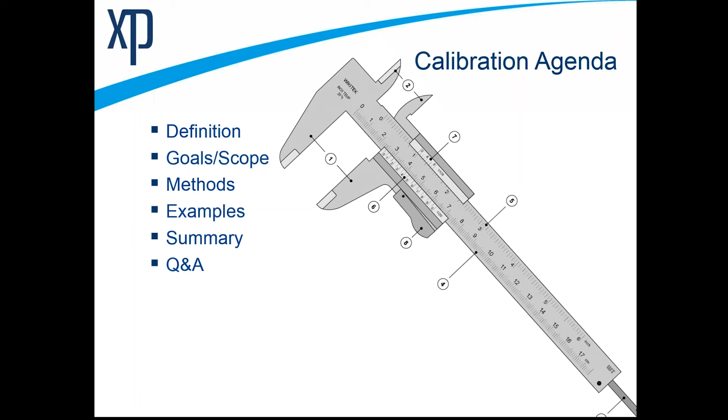So here's the agenda for calibration. I'm not going to give you the examples up front. You're going to have to suffer through definitions of calibration as well as goals and scope of calibration, but I promise you it will help you throughout the project. Then we will get into the different methods and examples of those methods. Time being available, we'll go to a summary and then Q&A, although Q&A is kind of occurring behind the scenes. If there's anything left over, I'll jump in at the end.

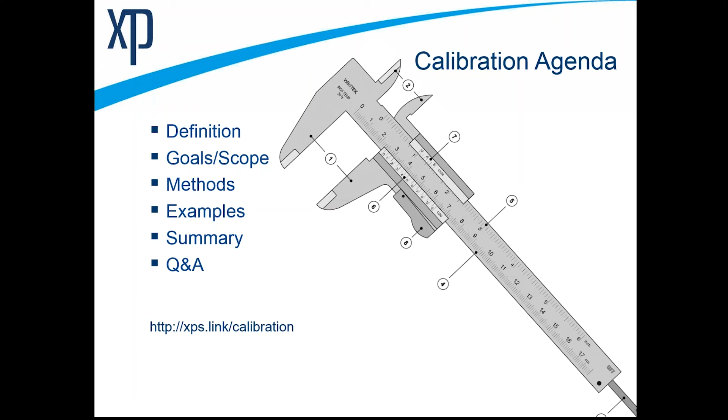Okay, so let's start with defining what we mean by calibration, because that's important. We need to be able to start somewhere before we move forward. I like to start with more official definitions. So this is a partial US EPA definition: model calibration is an initial testing of a model and tuning it to reflect a set of field data. And I like that. It's cut and dry, but it's a pretty good explanation of what I would say calibration is.

So if I try to own that a little bit myself, whenever I started calibrating models, and I've done it for a long time, I always start with this lofty goal of matching my model, right? Which, quickly after I looked at data, reverted to comparing reasonably well. So matching isn't going to happen, and we'll cover how that's really not even something that you practically want to do. But what are we going to compare it with? And I've thought of a few here.

Sometimes people compare it with another model, or a different method, or like your gut or intuition, or actual data, or maybe someone else's gut or intuition, like a field staff. But I thought that's just my idea, so I'm going to try to launch that same question to you. So if you have access and fingers, you should be able to vote the same thing. And you can vote more than once.

And there are definitely projects, as you probably know. If you are updating someone else's work from, say, a master plan update, you by definition most likely have another model. So you have something against which to compare. And this isn't what you think the right answer should be. I'm more interested in what you actually do. I don't judge too much.

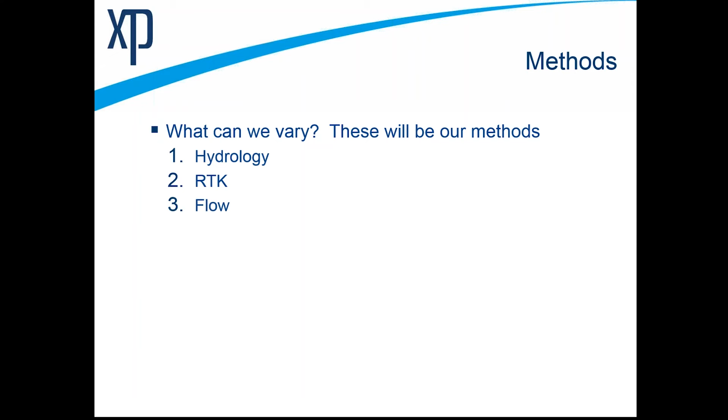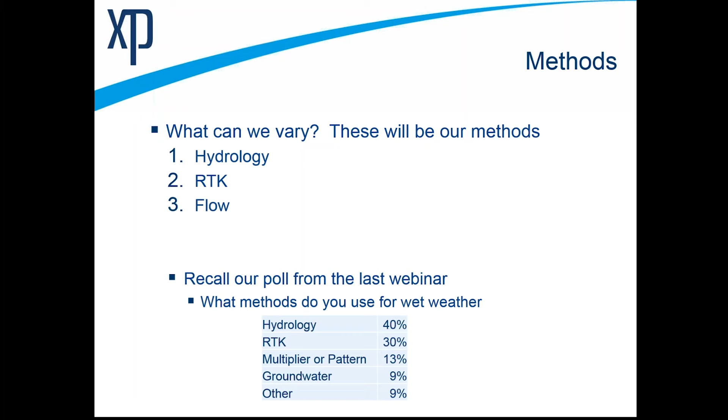So if you recall, we had a poll in the last webinar, and the question was, what methods do you use for wet weather? Again, specifically wet weather. Here's the results if you don't remember. And so again, those happen to line up with the top 3 results. So trying to stay true to those. So how are we going to approach these methods? Again, this is all the lead up to doing the work.

And this is a quote, it's a 3-part quote that I really like and I use often. So if you've heard anything I've done before, you may have heard this, and bear with it. So the first part is this: there are known knowns. These are things that we know that we know. So if you get a really good GIS system or you have good metering data, hopefully you know that, right? You expect those, and you're going to use that as your rock to start building your calibration.

There are known unknowns. That makes sense, right? There are things that we know we don't know. So on the modeling level, you don't really know what the results are going to be until you start working through it. And on the project level, because the model doesn't live in a vacuum, you also don't know what other issues you might have, even down to personnel workload. So there's just things that you kind of know that you're not going to know.

But I would submit to you even further than that, there is this concept of unknown unknowns, which you can thank Donald Rumsfeld for this quote 10 to 15 years ago, which when I first heard it kind of made me insane, but the more I think about it, the more it makes a lot of sense. And that is to say that there are things that we don't even know we don't know yet. And you can do 100 calibration studies and you still aren't going to be able to cover everything. You'll cover a lot more of them, you won't have everything. I mention that to say that, again, we're going to try to do our best to erase those unknown unknowns if we can.

So the first thing, and the reason we've talked all the way up to this point without showing anything, is the concept of standardization. And that's really documenting the goals and the scope. Now you may say, I have a contract, so I have some level of documentation. And I would say that's good. You probably don't have the right level of documentation in that contract of exactly what you're trying to do, and it doesn't have to be a quantified 5% of average and peak, but exactly what it is you're trying to do is really helpful to have. Otherwise, you kind of have one equation, 2 unknowns by the time you get to the end, and we really are trying to avoid that.

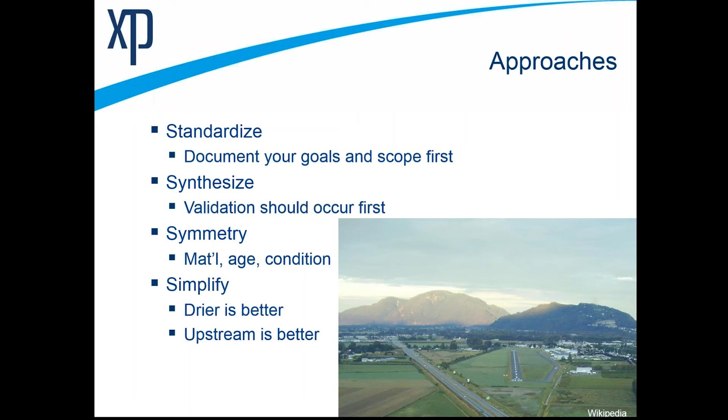Last thing here is simplify is better. You should do dry weather flow before wet weather because it's one less variable, and you should start upstream and move downstream if at all possible, because your upstream impacts affect downstream. So going the other way can lead you on quite a circular path. Okay, 20 minutes or so into it, first flow example. So we're going to start with the simplest one. This one will also cover dry weather.

Everything up to this point is kind of inferred wet weather, which is the harder calibration, but certainly you need to have something on the dry weather side. It's a very simple example because I don't want you to start thinking down the road too far. All we're going to try to do in this example is calibrate one junction against one gauge point, and this is just a flow meter. And I say again, this is a simplified example.

So let me see if I can run it. There we go. So hopefully you can see XPSWMM here is a real simple model. There are two outfalls in this model. Manhole 15 here to the northeast. If you assume that we're looking north, there's another outfall down here. And when I say simple, I mean simple.

So you can see the background image is a rug. I thought if I had a background image of an aerial, you might start thinking, well, what area is the sewer shed? But if I had a background image of a rug, you couldn't really overemphasize the complexity here, right? So we're starting simple. But you can see here, here's our manhole.

And so now I'm going to drag over some real data. This is real data, of course, applied to a completely fictitious area. And so this is usually what you get, right? You get some massive amount of data. This is only a few months worth of data, but what you can see here is in the 5 figures of just units of data. We look at that more as a row column.

What I usually see is something like a timestamp, a flow, an elevation and or level. It's usually level, and then a velocity. And again, usually this flow is somehow inferred by level and velocity. So that's not really that helpful on a 10,000 data point level. So usually what we'll do is take that and determine a diurnal pattern.

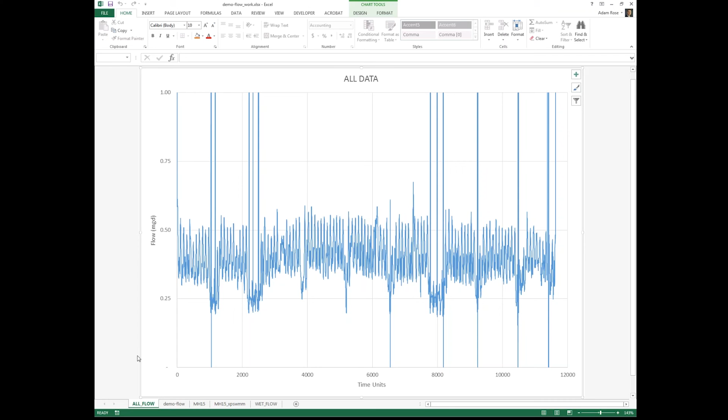Second thing I would say is, even though we have 10,000 data points, and most of the data points are in this area, you can see there's obviously some rainfall, right? A dozen or so rainfall events that shoot way up over 1. Well, the next thing I see people do is they take all the data, get this average of 0.41 and call that the dry weather average. But it's not the dry weather average because it rained during that time. That's the average daily flow.

This is a really simplified example. You'll see a little more complex on the next one. But all I did is said, I'm going to set a threshold.

So if my average is 0.4 million gallons per day, or 400,000 gallons per day, I'm going to set a threshold of 1 million gallons per day. So if the flow meter registers more than 1 million gallons per day, I'm going to remove a small subset of the flow on either side of that, and I'm going to consider that dry weather. Again, that's simplified, but let's try that.

So now I have what I'm calling actual dry weather. Notice the average is slightly less, as you'd imagine. So instead of 0.41, it's 0.39. And again, I can normalize that so that I have something that's over 1. So if I was doing a dry weather initial run for validation, I would be using this number, and I'm applying that everywhere in my meter shed just to validate what's happening.

If you can further subdivide that in XPSWMM, you can actually break that up per day. Because I don't know about you, but I don't come to the office to use the toilet and shower. I do that at my house. So the weekend and the weekdays are different. My consumption doesn't change appreciably, but where I consume it or use it changes. And as you can see in this example too, it does change.

Again, the average is 0.39. That's the dry average. We'd expect it to be the same as the average on an hourly basis. But if I normalize that, you can see that on Wednesday and Thursday, especially Wednesday, there's significantly less flow. So if I really want to do a longer term simulation, not just a day, but a week or several weeks, you might consider breaking it up on also a daily basis.

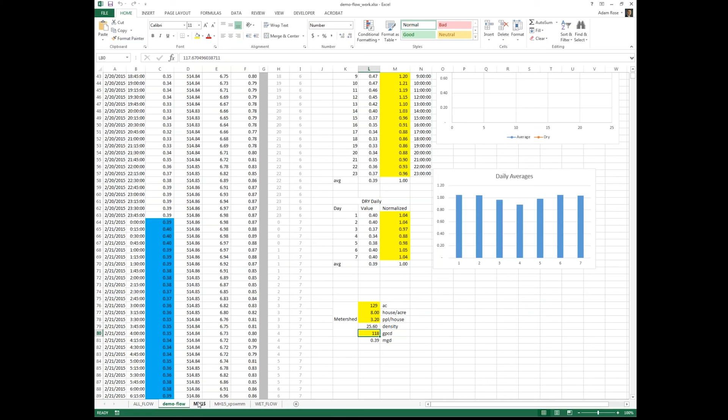So I will show you XPSWMM in just a second, but let me show you a graph of what that may look like. There's a lot going on here. But you can see the blue line that's kind of hidden in the back, this nice, beautiful curve, is what I am going to be inputting into the model. The nice, slightly deformed gray curve is what's coming out at the bottom of my sewer basin. And of course, you may say, oh, there's a little difference there, and that difference is through attenuation.

So the model is dynamic. So I load this hydrograph in at each individual manhole. It's attenuated as it travels through the system. So there's slight attenuation. This orangish color here is representative of the day against which I may be calibrating or validating, so an average day. And then you see this other line that kind of skews up and all over the place. It's just a different day, right?

So again, when we get into quantity of data, if you're going to calibrate, you need to calibrate to an event or to a section of events, and so you need to kind of pick that. You, by definition, will be off in other areas, but again, you're trying to minimize your error of that function of error in time, and there are literally dozens of different types of error estimating approaches out there.

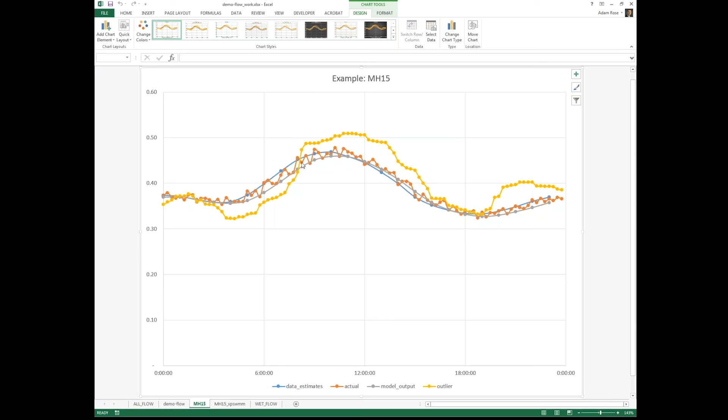But that's what we're trying to show, so let's go into the model real quick. So the first example I want to show you is this concept of validation. So in my base scenario, I'm looking at this manhole, and if I look at the results, aha, that doesn't look right at all, does it? Right? We expected something in the neighborhood of 0.4, and here you see something way up in 0.7 or 0.8. Well, that's double what we expected.

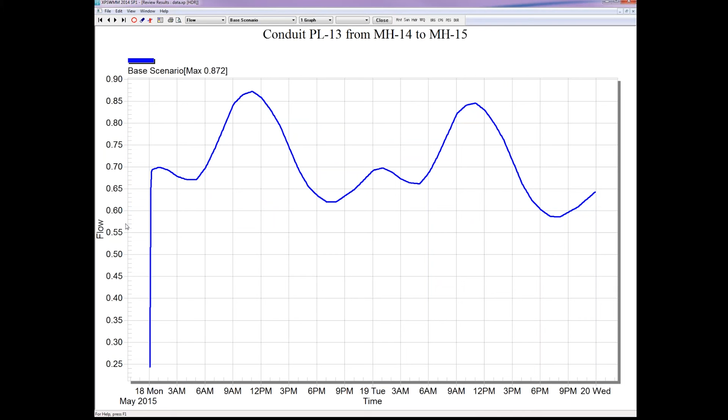So why is it double? That's a validation issue in my mind. And so in my simplified example, I did something that happens a lot, which is in an area of potentially not the greatest level of as-built, or otherwise there could be lots of reasons. This section of pipe here is incorrectly routed.

So this whole drainage area here is routed here, and really what we're going to try is a different option, which is routing it through a different scenario this way. So now these pipes route down to this outfall. That makes sense. Go back to the same one and check it. Aha, much better, right? Same information, but now we're down in the 0.3 and 0.4, so we're getting closer.

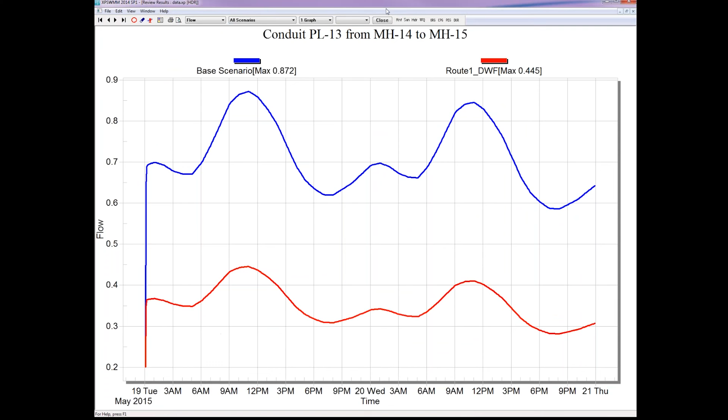And to show you what that actually looks like, I'm going to go into a manhole. I'm in hydraulics mode. I'm going to go into dry weather, and I'm going to look at my default dry weather pattern. And here you can see the flow rate. That's the 118 we had before. This area is specific to the sewer drainage area of manhole 14, the density of 25.6 we had before. And then if you look at the dry weather flow pattern, look at edit, that's the daily and hourly temporal pattern that we had before.

So we kind of stack the cards in our favor by doing the analysis in Excel, getting everything we want, entering it in and running it. Okay, dry weather flow, right? So that's kind of the cooking show version of I just pulled it out of the oven and it's ready to go. What about wet weather, right? That's kind of the harder thing to do. Let me see if I can find my, here we go. Go back to my Excel file. So we'll cover this one semi-quickly.

So here, if you see the orange, that's supposed to be indicative of a typical average daily flow. And you'll see in the next example a better way of doing this. But you can see what average daily flow would be if on this Wednesday in May there wasn't a fake rainfall event. And so here you can see this blue, and there's a lot of sociology behind how people act before, during, and after a larger rainfall event. But suffice to say you can see that we went from 0.4 up to 1.3 or 1.4, so just a very rough 4 times multiplier on flow, so not a small event, not a giant event for this area.

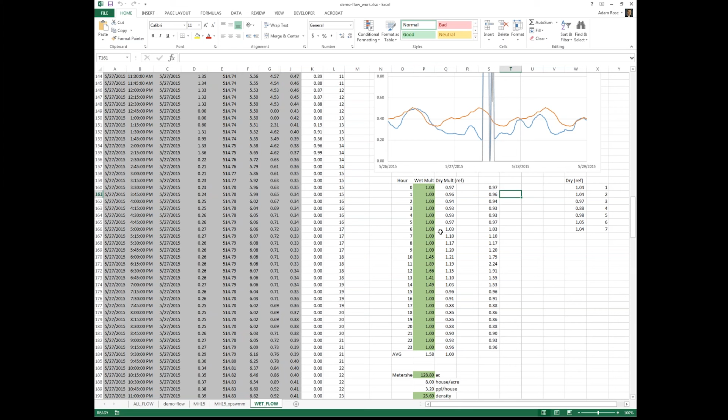But what I'm going to do by way of doing a second dry weather pattern is try to estimate this by using a second pattern. So now this one may get a little confusing. Before I talked over and over again about having a unitless pattern where I want the average to be 1. Well, in this case, I'm actually adding flow, so I don't want the average to be 1. I don't want to take away dry weather flow from other parts of the day and make it happen at a certain time. I want to add extra flow on top of it.

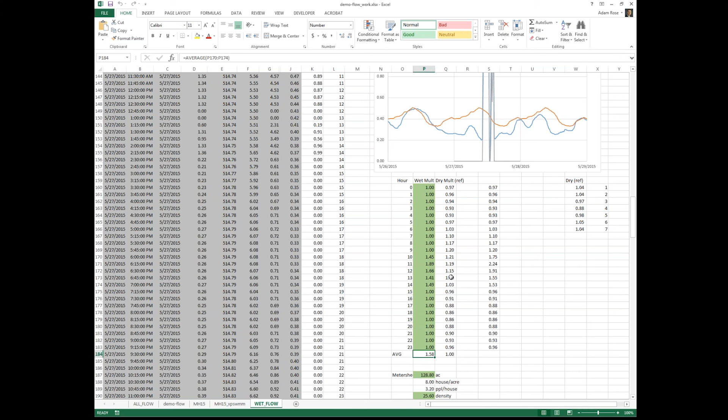So I'm going to do that just through some simple arithmetic of subtracting what I expected there versus what's actually there to get this multiplier, which you see in green. If you wanted to, you could add that as a direct time varying multiplier, or you could also normalize it. To be consistent in the approach, although I wouldn't necessarily recommend that approach, I've done the exact same thing before. So as you would expect, since we're adding this 0.7 on top of the 0.4, we have a higher gallons per capita per day. So what does that look like?

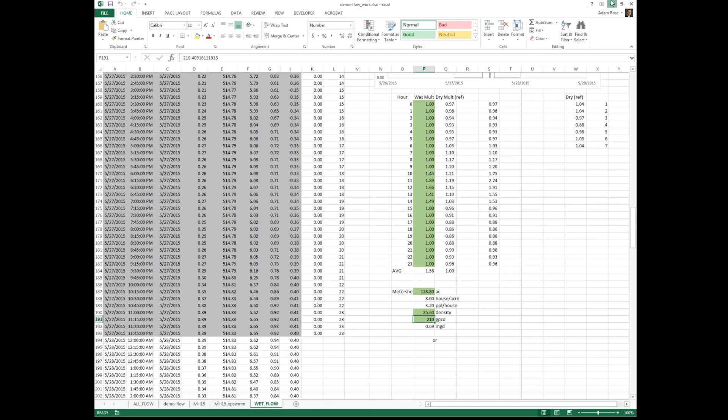Well, if I go back to my model, I've now in my scenario added a third one, which is wet weather. Turn off base because we know it's wrong. Again, you see we're getting further down in the scenarios where we don't want to make changes here in wet weather that are really changes that should exist in the base scenario.

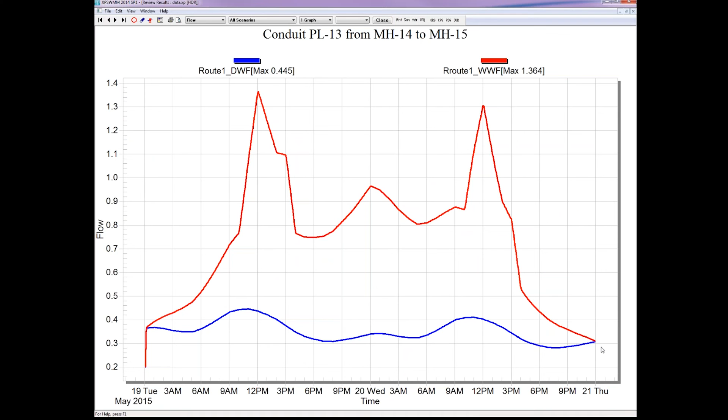If I look at my comparison, I can see that dual peak curve. This is only for one day I ran it, so you can see how it starts at the same, it diverges during the wet weather event, and it comes back and connects again. What does that look like on an individualized basis?

Well, if I go into dry weather, and again, it's not necessarily dry weather. One second. Let me get my actual scenario, my wet weather scenario. I'll go to dry weather. I now have wet weather turned on. If I look at that, there's the 210. Again, this could be a direct flow. I don't have to add all this per capita, but I just did it to be consistent. So 210, same area, same density. That's not changing because it's raining.

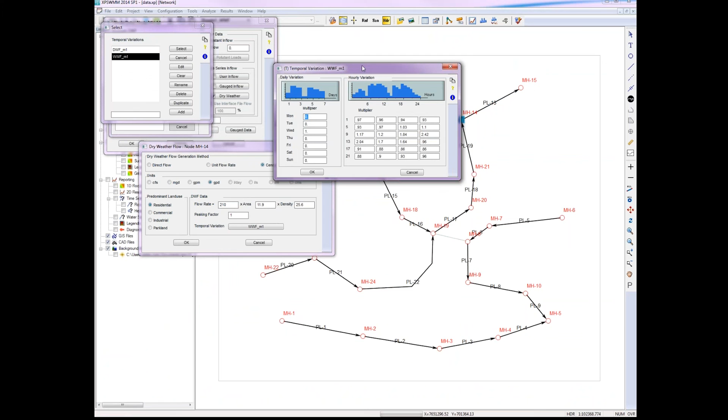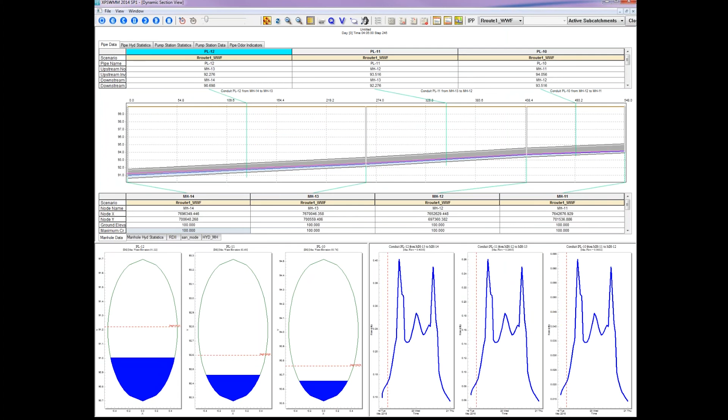And then I have my actual pattern. Again, this is a Wednesday pattern, so I'm doing it only on Wednesday to show a specific example. And there's my hourly variations on that. So if I wanted to continue, perhaps I wanted to show what this area looks like in a view like this. Well, this is something the model immediately allows you to do. This is that spatial extrapolation, or I can show model results in an area that I'm not metering by virtue of having well-metered data in one area.

So the next example is RTK. So here's a project, an actual project, oddly enough, down in the Southwest USA, and the demonstration here is to just show how to create and use RTK parameters. All right, and it's important, although we're only going to talk about one rainfall event, that RTK is rainfall specific. So if you have 10 rainfall events, you're going to have 10 potentially varying RTK values. So that's just an important side note.

Okay, I made this one green so I wouldn't lose it. I'll zoom out here. You can see this kind of larger collection system. There's actually only one outfall. It's way up here. There's just a really big pump station down in the southeast, but in the northeast is where we outfall. That makes sense? So if you want to know, see, there's the aerial to kind of show you where we are. We're in the outlying systems here. So what I'm actually going to do is use the launch application part of XP SWMM. I'm going to launch EPA SSOAP.

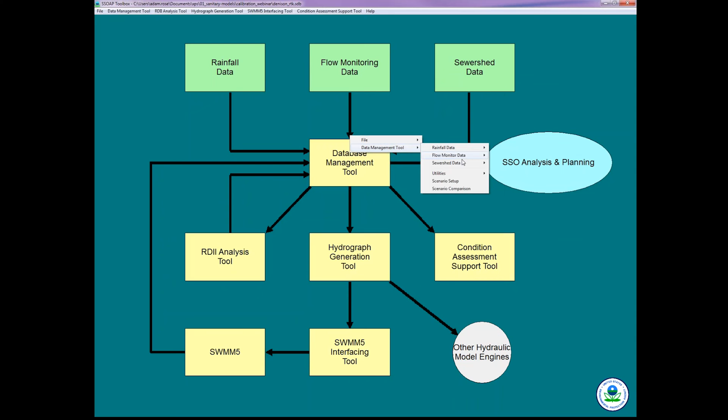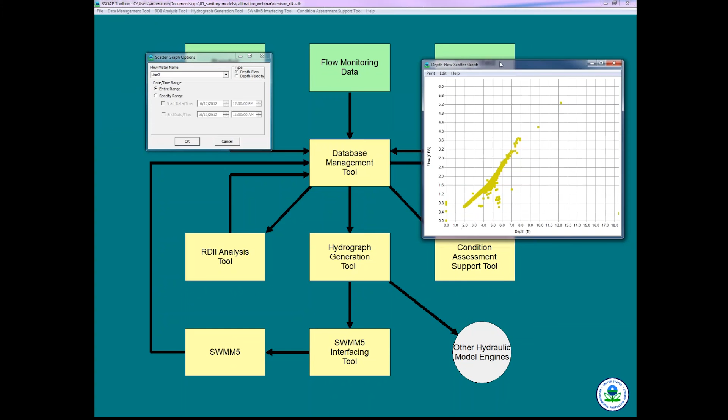But you can see if I look at my utilities, I've got rainfall data. You can see the rainfall data here for the different rain gauges, and you can also see that I've already loaded this one with flow data. In fact, you can do some neat scatter graphing. So we'll be doing line 3, that's the southern line, and I'll show you the whole data range, and drag it over. You get kind of neat scatter graphing type things, flow versus depth if you have that. It's just inferring data that's already there.

But for the purpose of this, we don't really care about that nearly as much as we care about our RDII graph. Again, we're going to go line 3, and SSOAP likes putting that on a different window. Okay, so here is a lot of data, right? So let's turn some of this off because you don't need to see all of it. Turn off some of the individualized curves.

And what we've got here is, yeah, this is where we'll start. And what you see here in green is actual flow. So this is flow happening. And this is the smarter way that EPA SSOAP can do this than me just using a quick Excel. It's actually telling me what it thinks the RDII is. So the red here is just the RDII.

So I'm going to go to event 1. So I switched over to event 1, which has added this little purple box to show you there's rainfall there. And now you see this line here. If you see that line there, that's my RTK derived values. So I'm going to turn off observed flow. So long and short of it is what we're trying to do is get our mustard colored line to look like the ketchup colored line there. And here are my RTK values.

As a quick review, R is fraction of rainfall, T is time to peak, K is lag time as a ratio for a short, medium, and long term. Those are 3 unit hydrographs that you add together to get 1 hydrograph. And there's initial abstraction, which is the concept of running a longer term event. It's turned off here. Because it's turned off, you can see up here there's a little more rain, and I'm not getting a response because I'm only really looking at this first event here. But that's fine for the simplified example.

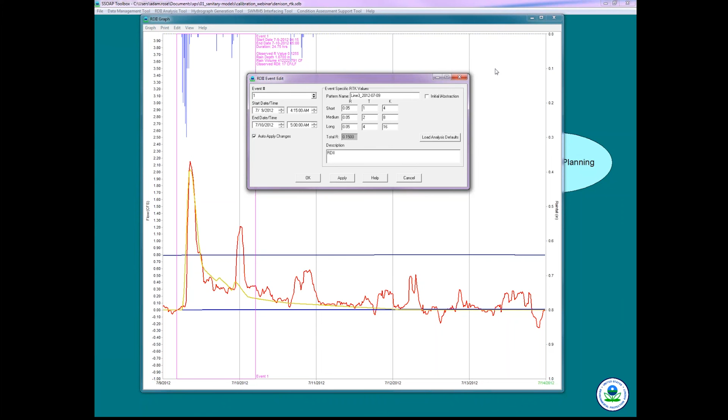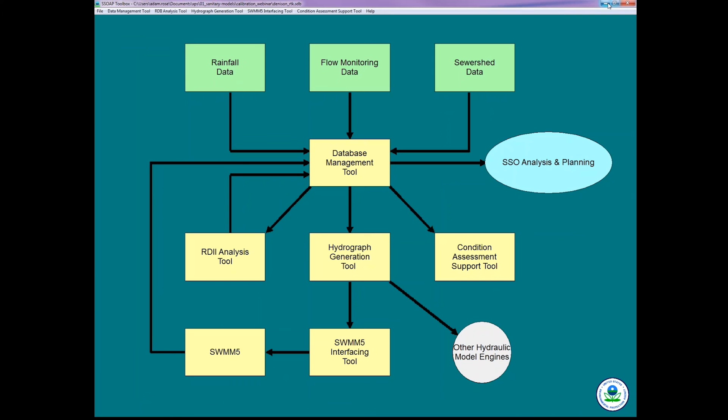I'm going to take that and say goodbye to SSOAP. And again, that's only for 1 line and for 1 rainfall event. So if I went to a different event, I'd have different RTK numbers. It's up to you and your intuition to pick the most appropriate one. There's some statistical analysis you can do in SSOAP, and we cover that in another webinar also. So there's different ways you can do that.

But over inside XPSWMM under global data, under rainfall, that's the rain. See, now we're introducing rainfall. So I actually have rainfall. So there's my line 3 rain gauge. I ran it for a shorter duration here, in interest of processing time. So I have actual rainfall, and you can see there's a lot of zeros, but there's actually rain through there.

So that's great. So we're actually introducing rainfall. The other thing that's important here is the RDII. We go to RDII, which is a global data. That's a record that you can use over and over again. And there we are, RTK, no abstractions, using that rainfall again, the line 3 rainfall, and the same R, T, and K that we just developed in SSOAP.

So we're feeling pretty good about the way that the SSOAP was calibrated because we made the changes. And now we need to take it over here and do the final bit of work. I'm now in runoff mode. The other thing you may not have noticed in my first example is everything lived in hydraulics. We're in runoff now. I'm going to randomly pick a node and show you what that may look like. If you're not familiar with runoff mode, don't use it that much. There's a sub-catchment. We're going to skip over that and cover that in the next example.

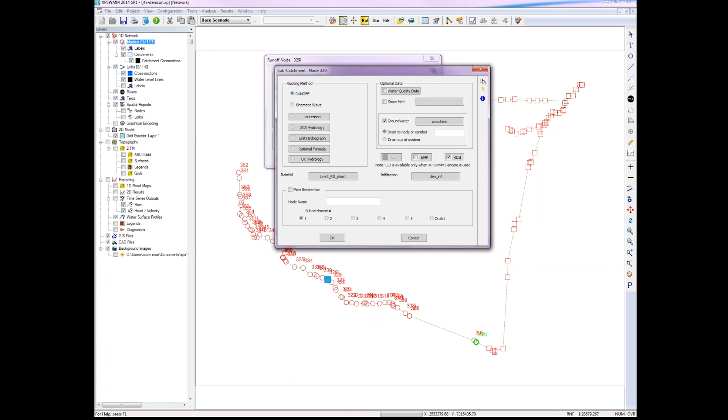We're interested in this RDII. So again, I just clicked on subcatchment. I'm in this single subcatchment, and I have an RDII. Notice I could have many RDIIs for different subcatchments. I'm picking this one, and I'm using a different sewer shed area. So the fact that my subcatchment said 5 acres is something that the model is going to disregard. It's going to use 113 acres. So that's the area part. We had that same area in the dry weather flow pattern.

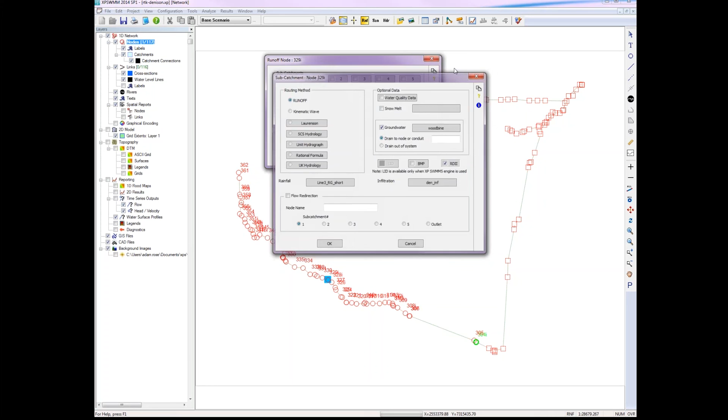Now I have my global database of RDII. Same thing we saw before, right? Same RTK as before. So that has the RTK and the rainfall. So now we can load that. We also, in this event, have actual dry weather flow data that lives in hydraulics. And notice in runoff, all we're doing is applying the data at the nodes, and then that data is automatically carried over in hydraulics.

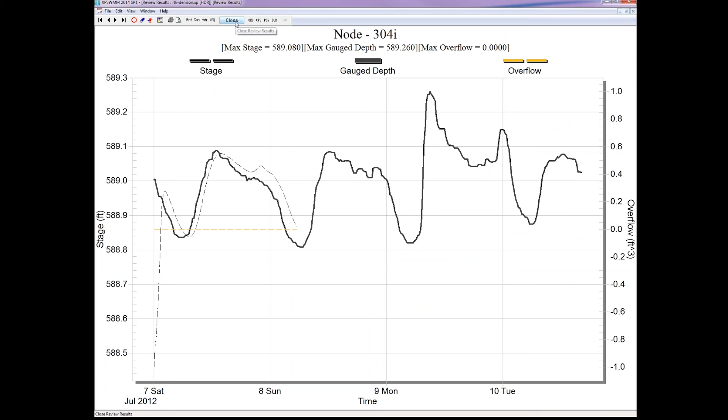And what we can do is go down to, in this case, the one node we're looking at. It looks like I didn't run the model long enough, unfortunately. Apologize for that, but you can see the pattern here. We're capturing the pattern. We haven't quite hit one of the peaks, but same idea. And we know that we're going to be relatively close calibrated because we use the RTK from SSOAP. So that's kind of an RTK example.

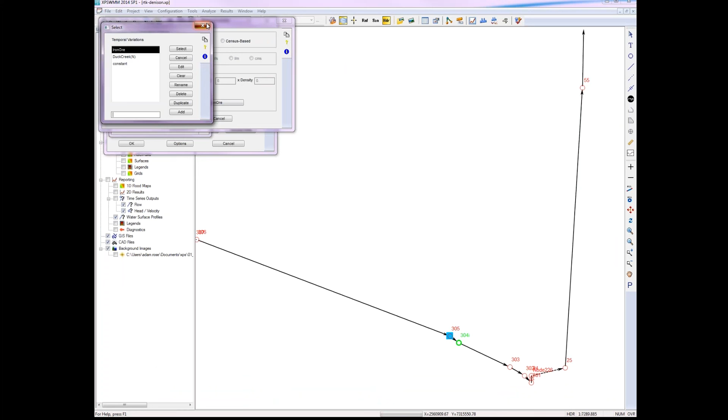And again, I can go in and have dry weather flow that operates independently. In this case, it is just direct flow, right? So it's just a direct flow, 0.022 million gallons per day with a different dry weather pattern variation. This time, instead of having a second pattern that's kind of wet weather but not related to wet weather, I have something related to rainfall itself.

Okay, we're doing okay on time. Final example. So we're kind of running backwards up the ladder. We did flow, and then we did RTK, and now we're going to do hydrology. After a sip of coffee.

So hydrology example, project summary, we're going to switch gears, and we have a medium separate sanitary sewer system in the northeast of the U.S. Demonstration goal here is to show you how you can interface runoff and hydraulics. And we'll be doing that using interface files. Let's click on the demo and fire it up.

Okay, now we're in runoff mode, and if I zoom out, you can kind of see down here this little red line dot here is where we'll be looking when we get into hydraulics. So when we go to calibrate, we'll be looking over here. We're in runoff, and now we actually even have this catchment, which is nice. I have a catchment area draining right here. I'm going to double click, and now we'll spend a little more time on subcatchments. Remember on RTK, I jumped right through this because we weren't as interested. Now we are strictly talking hydrology.

So now we are really trying to determine how the water falls out of the sky, how it's routed. We can do a lot of really complex work. And of course, there's some level of calibration just determining what type of method should I use. So let's look at this first. Now there's two subcatchments here, even though they drain together. So this first one is slightly larger, okay? And you can see we're using SCS hydrology. So a lot of you may be familiar with that. That's just using a curve number and a time of concentration.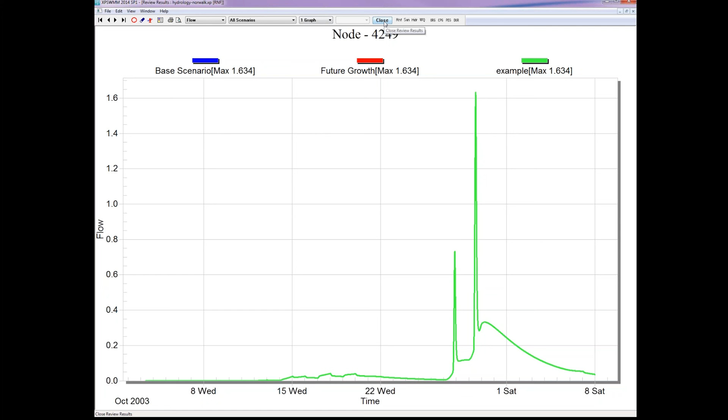If I run over to hydraulics, and I'll zoom in at the same node here, you see here time series inflows. I've got dry weather, just like I had before in my last example, and again, it's a direct flow with a temporal variation. This has nothing to do with rainfall. It's just my dry weather, the first thing I would do.

And notice here it's kind of small, but I'm using interface flow, which is telling the model that all that work we just did on hydrology, setting up two catchments, defining the curve number, the initial abstraction, the time of concentration, all that work, I want to take 30% of that and connect it in to the sanitary system. Of course, it's not directly connected. It's not like there's a grate out in the real world, but it's taking that 30% and putting it in.

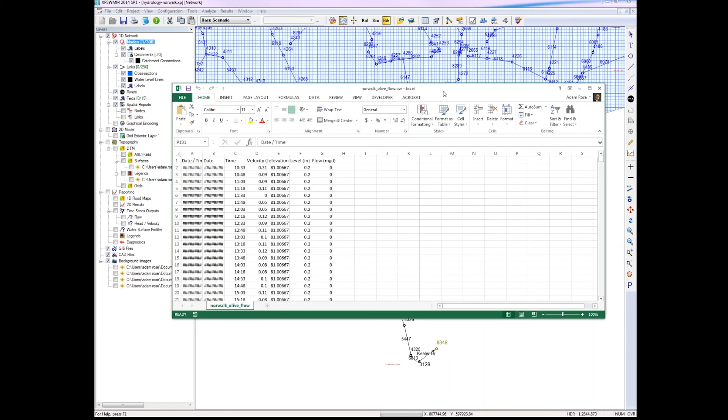So you have the calibration of trying to make sure that your hydrology is accurate, and then you have this translation, if you will, of the magnitude of flow I want to connect. And so in this case, let me get out and zoom in where I mentioned before. I'm down here, and this is where I'm going to be metering, and same idea as before, I've got actual meter data here, right? So I got velocity, elevation, flow, same idea.

In this case, there are 5,000 records of data. And because I have 5,000 records of data, if I actually go and look at this pipe 5445, under gauge data, I have gauge flow. Gauge flow is telling it, and this is the same as what we did in the RTK example before, I just didn't show you, go to my desktop and find that file we just showed, which I need to make sure I close, or XPSWMM's not going to like it. Okay, let me go back to where I was.

There it is there, and then I can pick a station if I need to. There are some standard formats that you can use, and if not, in our example, we went one further and we actually defined a flow meter. So in this case, you can see we can even skip fields. So we said, oh, it's a CSV, there's a header line, skip that first column, date, time, velocity, elevation, skip that column and flow. And that just tells it exactly how to read it.

Which means if I hit the, I think I still have it open. Yeah, hold on just a second. It wants me to, I don't want to save it. All right. It's all about permissions. Life is about permissions.

So now if I do open it, I can see everything. There's all the data, right? Which is the easiest way for me to calibrate. So now I've got the real data, right? Again, way at the beginning, we want to calibrate against real data. Well, now I got my real data. I got what I wanted. So if I go back here, F7 is my hotkey to show results. And you can see, look at that. We have our data over time.

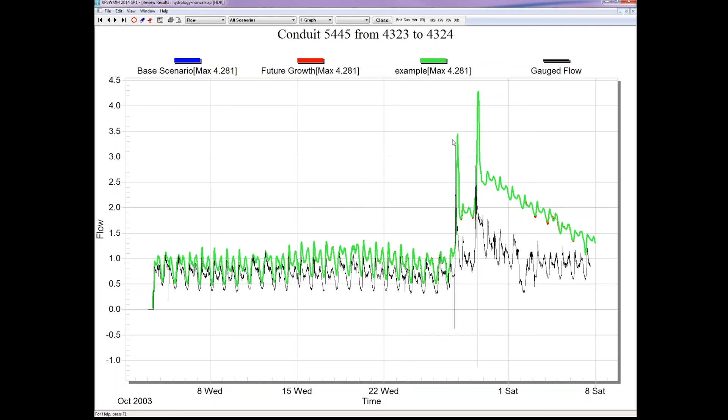Now I'm going to zoom in here as a precursor to the next webinar. You see all these jagged lines everywhere, and most of the data in our input data, I can tell you, is hourly data, right? So why do we have these jagged lines? Looks like an EKG here for hourly data that's supposed to be nice and smooth. My first couple examples look kind of smooth. What's happening here? Well, this model has pumps in it, so those are cycles of pumps, right? So we have a lot of pump action, and that has an impact, and making sure you get the pump correct is something worth doing.

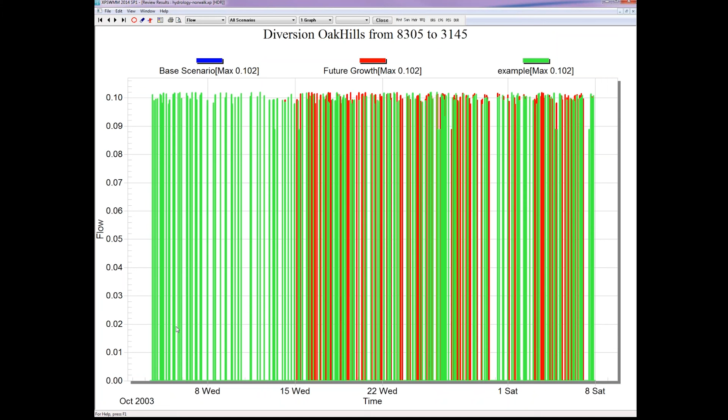So here's our pump, and you can see it's shooting up all over the place, on, off, on, off, on, off. And I can tell you from experience and through theory that the way the model shows that and what happens in the field should be very similar, but can often vary greatly for some very small reasons. That's my precursor to talking about pumps, which is our next webinar, to tie it all together. So there's this example, again, briefly showing you where you would calibrate and how you'd build a model.

All right. So in summary, just like before with wet weather, there's certainly different methods out there. There's different methods to try to show the model how the real world exists, and so as you imagine, there's different solutions for those problems. And hopefully this gives you some good content on approaches. Certainly your project is going to be unique, and there may be some complexities there that we didn't cover.